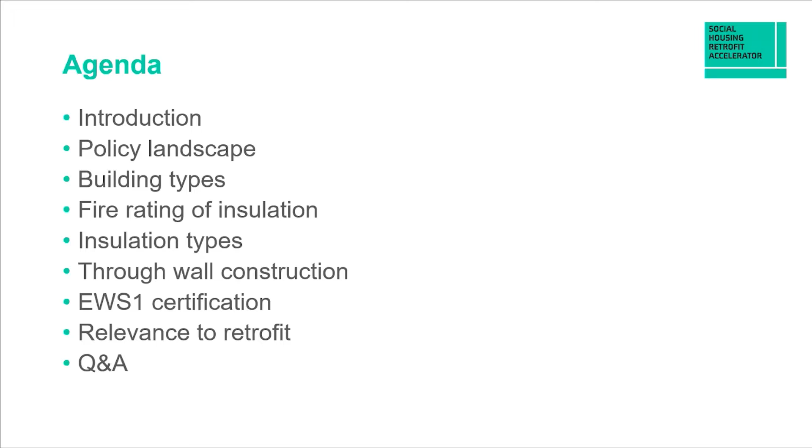So today's session will focus on external wall insulation and fire safety, including a review of the current policy landscape. We'll also explore different insulation materials and their associated performance with fire, and look into how this has impacted the private sector, more specifically through the introduction of EWS 1, before finishing up with a focus on retrofit.

So just to kick things off, as a sector, we know there's been many changes over the last few years that has witnessed considerable changes which have now been mandated through legislation. This includes the new Building Safety Act 2022, which aims to reform building safety legislation, including the introduction of new duties for the management of fire and building safety in high-rise residential buildings.

This is one of several pieces of legislation and guidance being implemented by government to enhance building safety, which also includes the Fire Safety Act 2021. This is seen as an important step, as the Building Safety Act will help people be and feel safer in their homes, and will result in changes in the way buildings are designed, maintained and managed.

A key area of focus is assuring the safety of higher risk buildings and improving the competency of the people responsible for overseeing works to higher risk buildings. This applies to new or existing occupied buildings over 18 metres or 7 stories or more, and helps clarify who has responsibility for fire and building safety throughout the life cycle.

One of the biggest changes to regulations is the implementation of 2 key roles: the building safety regulator and the accountable person. The building safety regulator is responsible for overseeing the safety and performance of systems of all buildings, and have been given the powers to enforce the rules and act against those who do not comply. This role is principally aimed to secure the safety of people in and around buildings and improve building standards.

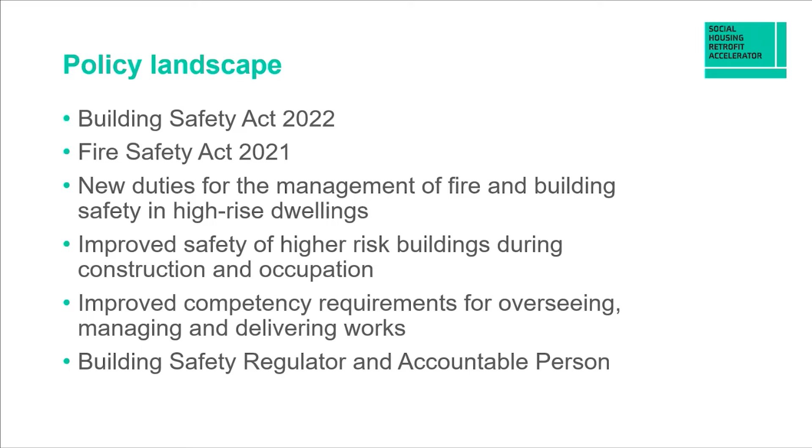So how does insulation materials play a part in affecting fire and building safety? We know that using insulation in buildings is key in reducing the amount of carbon dioxide emissions associated with heating our building stock, helping make buildings more energy efficient and reduce operational costs. However, how safe is the insulation specified in the many refurbishment projects going up and down the country right now?

There are a number of variables involved, and this very much depends on which insulation materials you're using and where. And for a fire to grow, we know 3 elements are needed: heat source, oxygen and fuel. In a building, the fuel is any kind of combustible material such as furniture, carpets, curtains, etc.

And choosing non-combustible insulation reduces the potential fuel content, offering the best performance when it comes to both reaction to fire and fire resistance.

There are numerous insulated cladding systems available to market, and the performance of the cladding in terms of surface spread of flame, contribution to fire growth and fire resistance needs to be fully understood when specifying a system.

Reaction to fire is the material's ability to contribute to the growth of a fire by acting as a fuel source. And fire resistance is the material's ability to resist fire for a given period to prevent its spread and maintain the structure's integrity, meaning occupants can safely exit in a fire's fully developed stage.

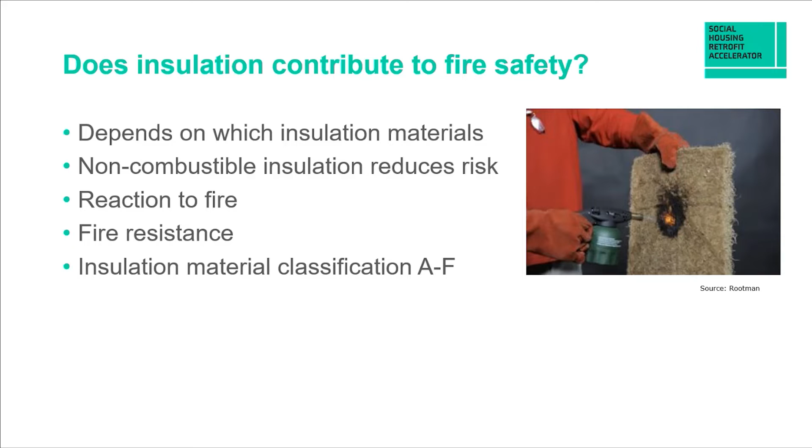So how do we know which insulation material to use for our project? This can be a very difficult decision to make, and quite often in higher risk buildings, there may well have to be trade-offs between achieving a minimum level of thermal performance and eliminating fire risk.

As we can see, it is best to choose insulation with an A1 or A2 fire rating to ensure the highest possible levels of fire safety and to eliminate as much risk as possible.

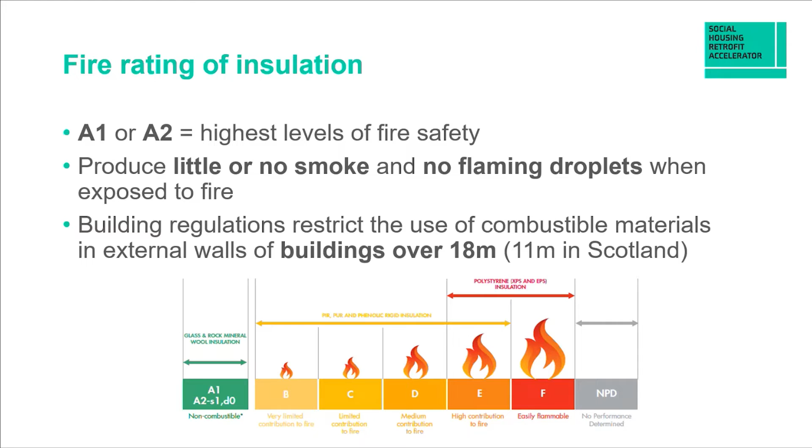Materials that achieve A1 or A2 rating produce little or no smoke and no flaming droplets when exposed to fire. Minimum standards defined within building regulations also restrict the use of combustible materials in the external walls of buildings over 18 metres in England, and this is for buildings over 11 metres of height in Scotland.

So as previously mentioned, quite often within your retrofit project, there will be a range of competing priorities in respect to levels of thermal conductivity. There may be a requirement for a certain level of acoustic performance, as well as addressing fire safety and potential embodied carbon as well. So we know that insulation in buildings is used throughout the building envelope, covering key heat loss areas such as walls, roofs, and floors.

However, other key areas are required, particularly in higher risk buildings, as part of a compartmentation strategy to ensure the project has appropriate fire stopping between floors and walls, as well as cavity barriers to concealed spaces such as eaves, verges, and windows to restrict the potential spread of smoke and flame within cavity areas. A material often overlooked or missed on site, even by experienced professionals, is asbestos. However, we know this can cause devastating health problems when ACMs are disturbed and exposed over long periods of time.

So to achieve enhanced performance and increased thermal conductivity values, spray foam is often seen as the go-to solution, particularly for areas such as subfloors and roof voids. However, it's important to recognise this could lead to higher toxicity with elevated VOCs, harmful chemicals, and many spray foams may still degrade and even ignite at extremely high temperatures. Many spray foams also present a considerable moisture risk to buildings, which needs to be carefully evaluated prior to its application.

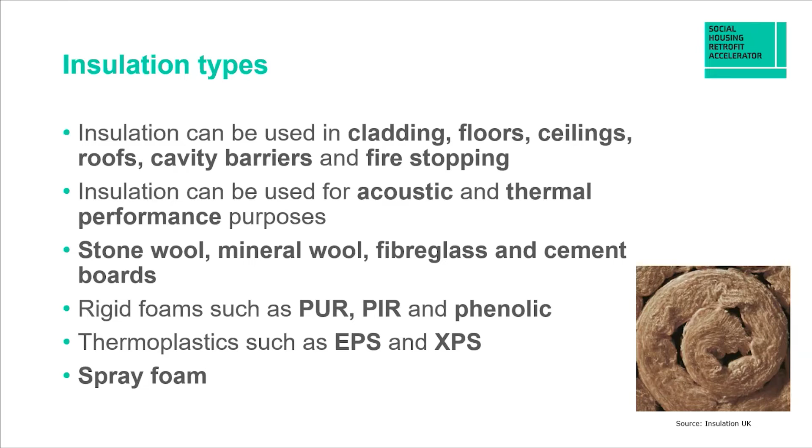So generally, when we speak about higher risk buildings, insulation and their fire safety, this is centred around high-rise tower blocks with a storey height of 18 metres or more. As a sector, we know there's been significant focus and scrutiny on our high-rise tower blocks in response to the Grenfell tragedy, and understandably so, with many multi-million-pound remediation projects now underway to remove existing dangerous cladding and insulation systems from existing buildings.

In Scotland, recent amendments to the building standards mean the ruling for the use of non-combustible materials in external wall systems applies with a storey at a height of 11 metres or more. However, we are seeing more local authorities and building owners take a belt and braces approach, with non-combustible insulation being specified on buildings below 18 metres in England and 11 metres in Scotland.

To give a bit of context to the scale of the challenge, there's around 10,000 tower blocks in England that still feature an ACM cladding system similar to what was used as part of the refurbishment at Grenfell, rendering thousands of homes unmortgageable with significant health and safety risk.

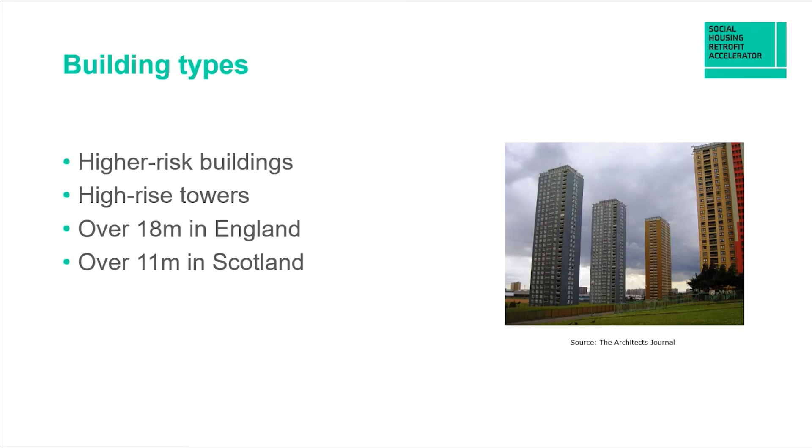When we speak about building types, usually we define these as typologies or archetypes based on similar construction form, geometry and layout. However, when considering the implication of fire, it's also important to consider buildings in respect to their unique features, such as recessed balcony areas and access. This is important as balconies provide opportunity for fire spread across the facade.

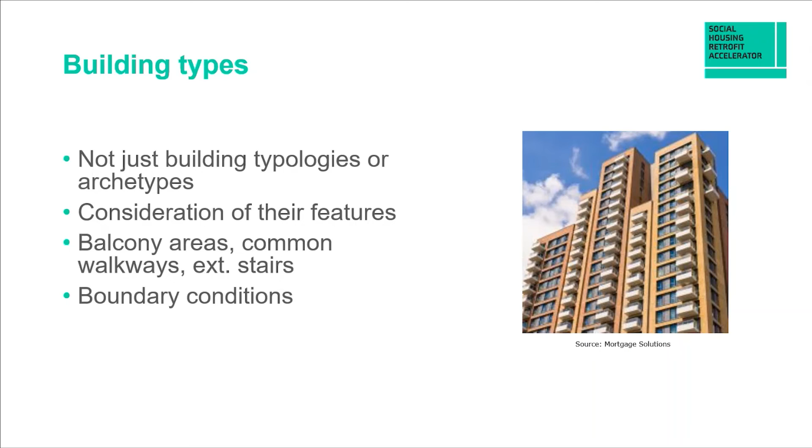In terms of access, it's important to consider if there's any communal walkways or closes externally, and if so, what materials make up the external wall system. Are these combustible? Fire separation and adjacent properties are also important to consider and must be captured in any fire risk assessment and management plan. So there's many considerations to bear in mind when it comes to the through wall build-up.

And key areas to consider include the substrate. Is this masonry, steel, concrete, or something else? Is there a ventilated cavity? Has a compartmentation strategy been developed, inclusive of cavity barriers and fire stopping? Are you looking to introduce a rainscreen cladding system or facade system supported by rails rather than a direct fix system? Is there a sheathing board required to support the installation system?

And quite often it will be difficult to confirm the through wall build-up, particularly of modern residential apartment style buildings, and any investigative works will rely on intrusive inspections to be 100% sure.

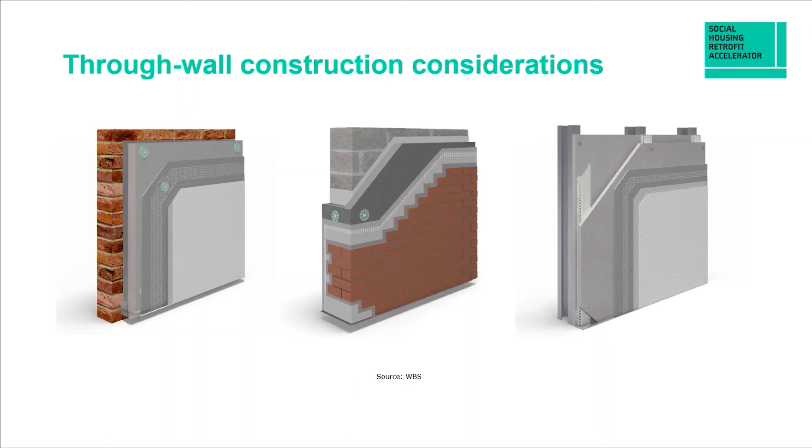So what is EWS1 certification? So the External Wall System 1 form process helps banks make lending decisions on buildings with potential fire risk. The form, which was introduced in December 2019, is designed to reassure mortgage lenders that buildings that are predominantly over 18 metres in height are safe and free from combustible clad materials through a standardised process.

The EWS1 comprises of the outside wall of a residential building, including the cladding, the insulation, fire break systems and its fixings. Buildings requiring EWS1 forms include high-rise blocks of flats, student accommodation, care homes, as well as HMOs.

The initial focus over the last few years has been in response to the Grenfell Tower fire, with the removal of aluminium composite material cladding from high-rise residential buildings, with the attention then broadened to take into consideration other types of combustible cladding systems, such as high-pressure laminate, or also known as HPL.

These surveys are generally of a non-intrusive nature and require a chartered fire engineer to assess the building before giving a classification in terms of its risk. If there's any uncertainty about the through-wall construction, then some small sections of the wall system are usually cored to verify what materials have been used.

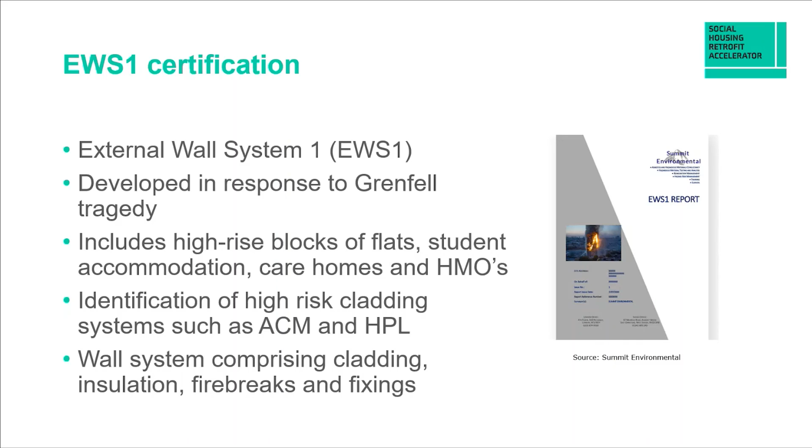So how is all of this relevant to retrofitting buildings? So firstly, having good quality and robust data is essential in being able to proactively demonstrate compliance. If you don't have any up-to-date information from assessments across your higher risk building stock, then this should be identified as a priority to avoid increasing risk and exposure.

Externally applied insulation systems have the potential to offer a pathway for the spread of fire up the outside of buildings if not adequately controlled through the design process. High-risk materials such as high-pressure laminate or phenolic are deemed non-compliant under building regulations. As a result, designers should work towards addressing the risk of fire spread for buildings in line with building regulations and best practice,

inclusive of a bespoke design with appropriate construction details and drawings, as well as the provision of a condensation risk analysis and pull-out test to assess whether the building is sufficient for the system design. This process should be collaborative between system manufacturers and the project design team.

Building control will also expect to see external wall systems utilised that benefit from third-party testing and certification through BBA, EWI or equivalent, and these should be appropriate to the building in scope. For example, if you're looking to install an insulated render system at a high-rise tower block, then typically this should hold an appropriate BBA or equivalent certificate that has undergone appropriate testing in accordance with BS 8414.